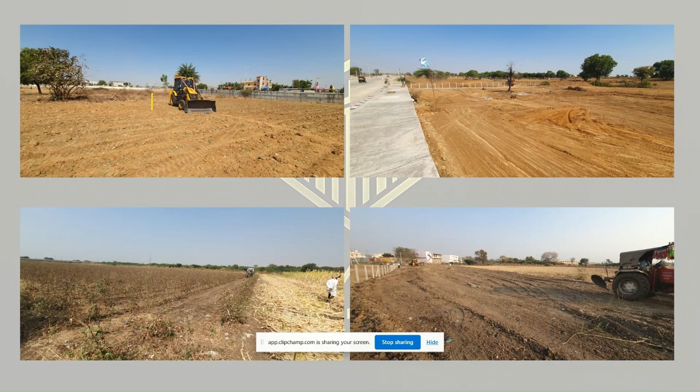Sometimes we can definitely find rocks as well as big boulders which need to be blasted and shifted, so that can be carried out. The same land is on the left hand side; you can see on the right hand side bottom corner, it's been cleaned properly with dozers itself.

Now we'll come to the second part, which is the government survey. This doesn't belong to the civil part, and I will focus more on the civil engineering part. This belongs to the legal team. But anyhow, in order for you to come to a complete understanding of the chronology, I am adding it here.

So after we have done the cleaning and all these things, we have to apply for the government survey, which is mandatory, because once you do the survey, you will get to know all the conflicts, all the area discrepancies, or any sort of activities done on the land can be identified by going for the government survey.

Government survey can be done either by chain method, like chain survey method, or it can be done by plane table method, depending upon the area where you are living. So if you want a detailed part for chain survey as well as plane table method, I can make a separate video for that, so that you can have a better understanding of the methods which we are using there.

And in this, once you have applied for the government survey, we have to officially invite the surrounding landowners, so that they can witness the survey, so that no dispute shall arise in the future stages. Because what happens if the survey is done without the presence of the surrounding landowners, they will not agree to the fixed boundary points.

So they should be available there, and after that you should mark the boundary points with the lime wash powder, because once the survey has been carried out, the government surveyor will identify the boundary point, and they will fix the boundary point. So you have to mark your boundary point so that you can claim the ownership there, and this should be done in the presence of the surrounding landowners.

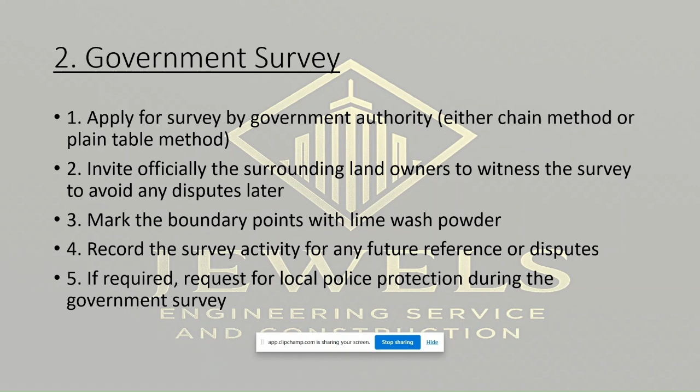And for the better execution part, it is suggested to go with the police protection during the government survey, because usually there will be conflicts coming even for 1 feet or 2 feet. There could be a dispute between the landowners, so it's better to have a local police protection, so that the survey can be completed in a peaceful manner.

Now we'll move to the fixation of boundary points. Here, once survey is completed, like the government survey has marked all the boundary points, you have to fix the boundary points in presence of the government surveyor, because if the surveyors leave the site, nobody will agree or nobody will value your points regarding the boundary points. So in the presence of the government surveyor, start fixing the boundary points.

This can be done either you can erect the cement posts, which are usually 8 feet or 9 feet. These cement posts can be erected wherever the boundary points have been marked, or else you can erect metal hollow pipes, so that these points can be later identified by yourself as well as the surrounding landowner, so that no disputes shall arise. Because when you are dealing with bigger amount of land, there will be definitely disputes between the surrounding landowners. Okay.

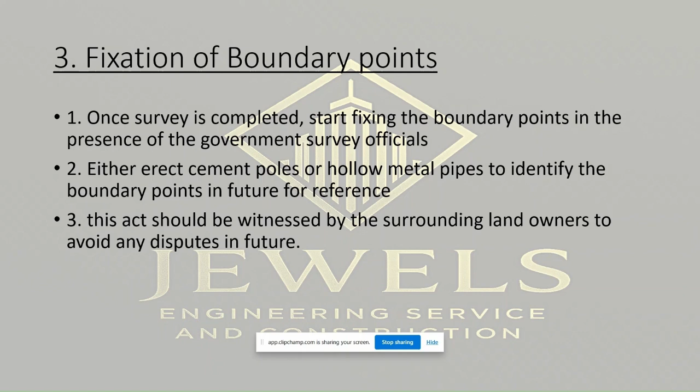Now, this act, like fixation of the complete boundary point, should also be witnessed by all the surrounding landowners, so that they should agree to the fixed boundary points, and they should not change their statements later, like they don't value their points later. So it should be done in the presence of government surveyor as well as the surrounding landowners.

Now we'll go to the erection of compound walls of the boundary points. Why we are doing this erection of compound walls? Here the question arises, like once you have already marked the boundary points, it is necessary and essential to claim your own land. So if you are not claiming your land as soon as possible, definitely the points could be shifted, or the surrounding landowners can again start some sort of dispute.

So once you have done the marking, like the boundary points have been fixed, you can start marking the line with the help of lime wash powder, and start excavating through the marked line with JCB or the backhoe, so that you can create a small valley there, which cannot be disturbed or which cannot be altered in your absence.

So once the boundary points have been fixed, you can start marking with lime wash powder, as well as you can excavate with a smaller bucket of the JCB, which is almost 1.25 feet, so that you can have a small channel type valley, which can be kept as a reference part.

Once that has been done, you can start erecting the compound wall. Erection of the compound wall can be done by two things. Either you can do it with the help of precast compound wall, or you can proceed with the masonry wall.

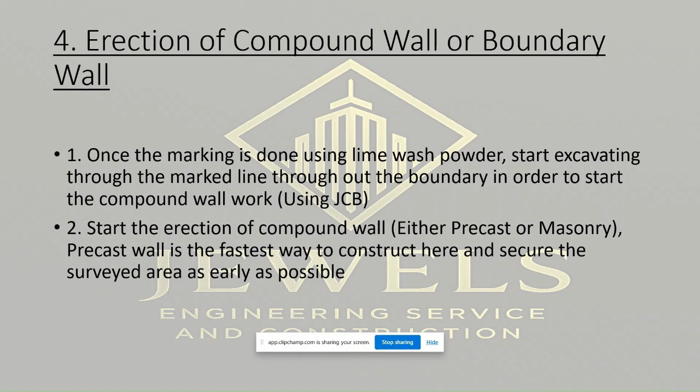Here, precast compound wall is the fastest and better way to construct, because they are already making the panels there. The poles have already been constructed. They will just bring the material and start fixing the wall. But if you go for the masonry part, it will take a lot of time, and the cost of a masonry wall as compared to the precast wall is quite high. So it's preferable to go with the precast compound wall; it will be easy to construct within no time, and we can easily secure our area as soon as possible.

Now we'll start with the plot stoning part. Once you have done the compound wall, you, being an engineer, will start to prepare a layout map. This layout map should be prepared in accordance with the government authority, like the town planning authority, as per the rules and regulations. What are the rules and regulations? They will have percentages for road, CA and garden. CA stands for civic amenities, which include septic tank as well as water tankers. And garden, residential, and commercial area in percentage. So these percentages should be incorporated in the layout map as per the town planning authority, so that your map is 99% accurate when it goes for the approval of the authorities.

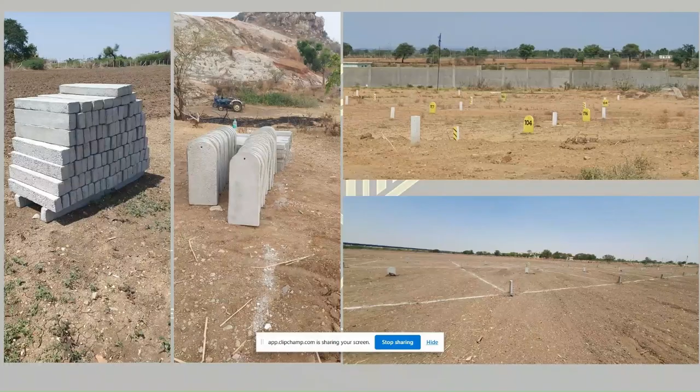Once you have prepared the map, you can start doing the plot stoning work. The plot stoning work can be done either using natural stones, which are cut to size, or you can use precast plot stones. So here I will show you. On the left hand side, we have precast plot stones, which are almost 2.5 feet to 3 feet in height, and the section measures 5 inches by 6 inches. These can easily be purchased. They are cheaper in rates, they can be brought to site with ease, and they can be used as plot stones and boundary stones.

We have covered an area for CA and garden of 17%, which is quite high. As per the government norms and local authority rules and regulations, the CA and garden should have a minimum of 10%, and the roads should be from 30 to 33%. So here the roads are within the percentage, but CA and garden we are increasing because, as per the land orientation, we cannot fix plots which are not sellable. And the residential part is coming to 51%. The residential part should be between 50 to 55%, covering the residential or commercial plotting part.

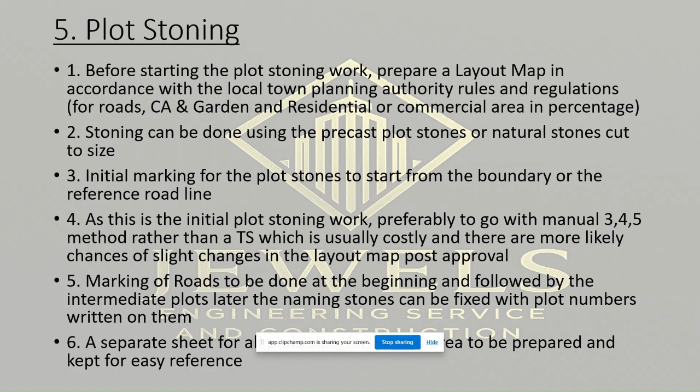So to be more professional, prepare a sheet with complete areas, facing, as well as the number of each plot with every dimension they have, so that the sales team can reply to the customers.

Once you have received the approved map from the local authority, which could be the same one you prepared, or it could have slight differences from the one you prepared, you have to do re-stoning here. Why? Because the stoning which you have done was based upon the initial one, and now we are talking about money, and the approved map has already been taken from the government authorities. Now you have to go with the final stoning of the plot.

For the final stoning of the plot, you have to use the total station method for precise boundary point marking. Once the complete TS marking has been carried out for each and every plot, you can start the re-stoning work. You can use the same stones which were used earlier. You can just remove them from the ground and plant them wherever you have got the points.

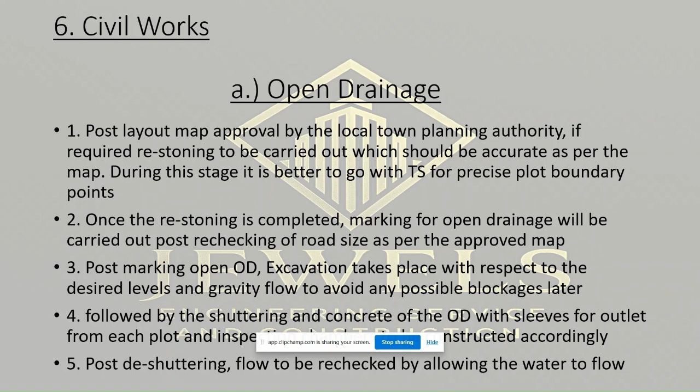You can just put some water so that the gravity flow can be rechecked. So in future you will not be encountering any sort of blockages, and there should be no requirement of booster pumps or pressure pumps. The water should flow in this gravity manner and should reach our sewage treatment plant.

So depending upon the layout, and also depending upon the total plots available, you have to decide the capacity which can be coming in at the worst condition, so it can be designed as per that.

Now we'll go to the underground drainage part. Once OD, open drain, is completed, UGD is done. UGD is carried out basically in urban areas rather than rural areas, because in urban areas it is mandatory to go with an underground drainage system, whereas in rural areas we don't have such norms required by the government authority. For UGD, we will do the same as we did in OD with respect to road marking. Here we will be marking the manholes and the intermediate connections with respect to the slope required for gravity flow.

We are marking the manholes first, and where the manholes will be coming will be as per the design received from the contractor, any engineering consultancy which we have hired, or the design team. After marking the manholes, we will be marking the intermediate connection for each and every plot or each and every open drainage part. This should also be maintained with respect to the gravity flow, to avoid any sort of blockages or any requirement of pressure pumps or booster pumps.

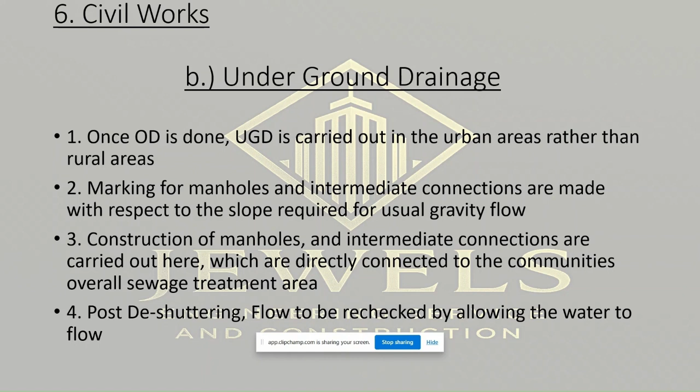Once we have constructed the manholes, intermediate connections are also connected, and this whole network of connections is taken to the sewage treatment plant, or we can say septic tank. It depends on how far it is. So we'll be diverting the whole sewage, the whole UGD as well as the continuous part, toward the sewage treatment plant. Once the concrete has been completed and the de-shuttering has also been executed, we can again recheck the flow of water, whether it is going smoothly without any blockages. It should be done with respect to the gravity flow.

Now we'll go with the road. The most important part of this township development is the road, because this is the access which you are providing for all the customers, so that they can reach their particular plots or particular area within the layout. So it should be designed and executed in a proper manner. We consider this the most important part in township development.

First you finalize the road design. How can we finalize the road design? It could be either a BT road, bituminous road, or an RCC or cementitious road. We have two different types of road. Once the road system has been finalized by your organization or by the consulting agency, you can start executing the work. Here we will be excavating the existing marked-up road so that after the complete procedure of construction it should match the adjacent existing level of the road, not slightly higher, not lower.

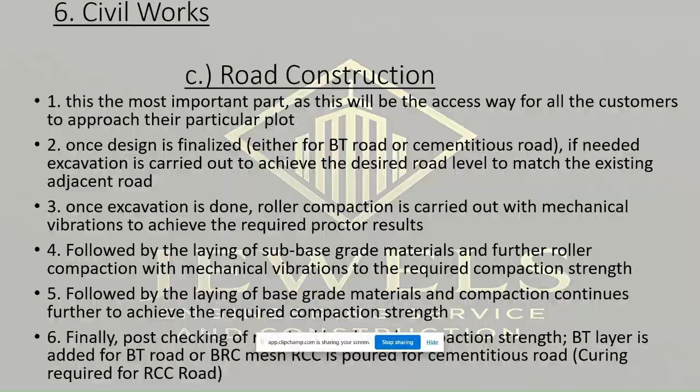And this should be compacted in adequate layers. You cannot dump all the material at once and start the compaction. You have to do a single layer, then you have to start compaction. The layer can vary from 100 mm to 200 mm. Usually, we'll go with 150 mm thickness of the layers, then we'll be having compaction there.

Now we'll see the roadside plantation. Why do we have to plant the trees? Because it has become mandatory nowadays from the government authorities, so that the environmental ecology can be maintained. And in order to restore the environment in a green way, it has become mandatory now to plant the trees within the layout on the roadside.

The plant usually comes in the space which is left between the road borders and the open drainage. And here, the quantity of plants we can calculate with respect to the number of plots. For each plot we are dedicating one plant, and it should be placed in such a manner that it is either at the starting point of the plot or at the ending point of the plot.

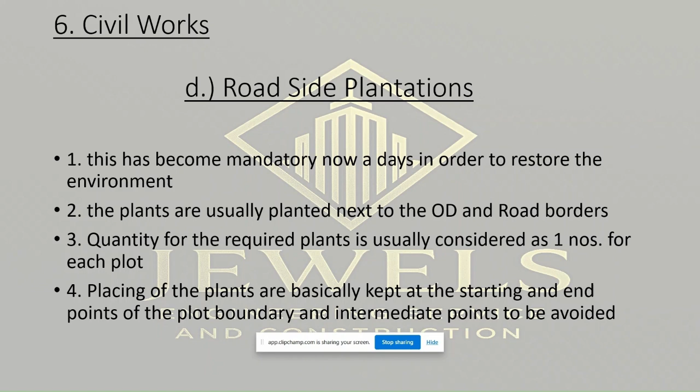Now we'll be having electrical and water supply connection. This surely depends upon the legal team as well as the design team which we will be having.

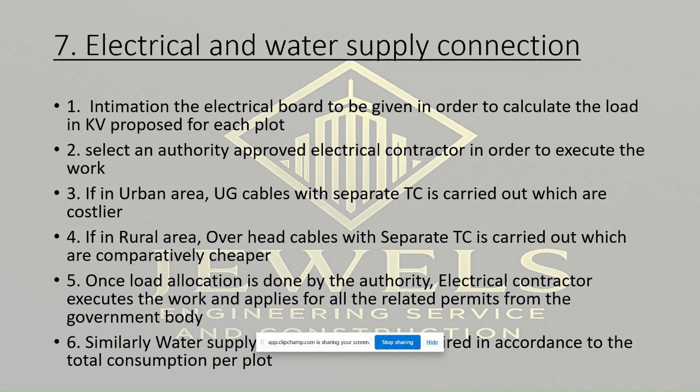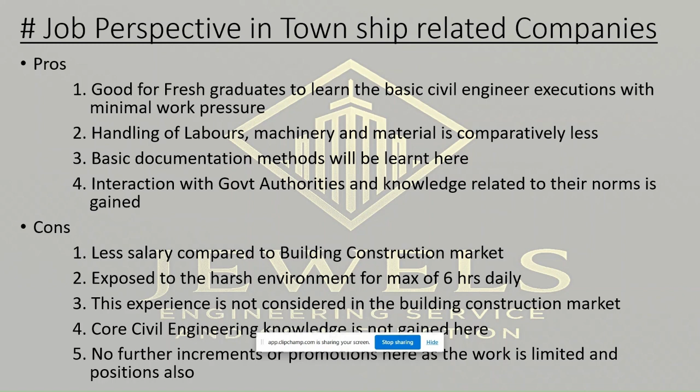As far as I am concerned, it's good for engineers who have just passed out and want to just surf the industry or look for an experience for almost one year or 1.5 years. It's good for them. Go for this industry, but don't continue in this industry for a longer period of time because it is not helpful at all.